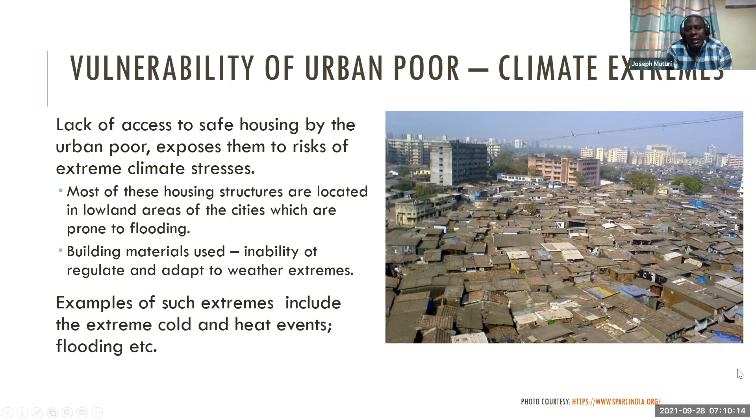We mobilized 40 organizations - civil society organizations, academia, local NGOs and international NGOs. The basis for that was they bring in their expertise, their resources, their staff to support the county in planning for Mukuru. All these plans were aligned with the county departments - for example, the environment consortium was under the Ministry, under the Department of Environment. So we mobilized organizations like the Stockholm Environment Institute and others good in matters of environment and climate.

There was a consortium looking at the land question, a consortium looking at education, and others looking at waste management. Basically each consortium was to work with the community.

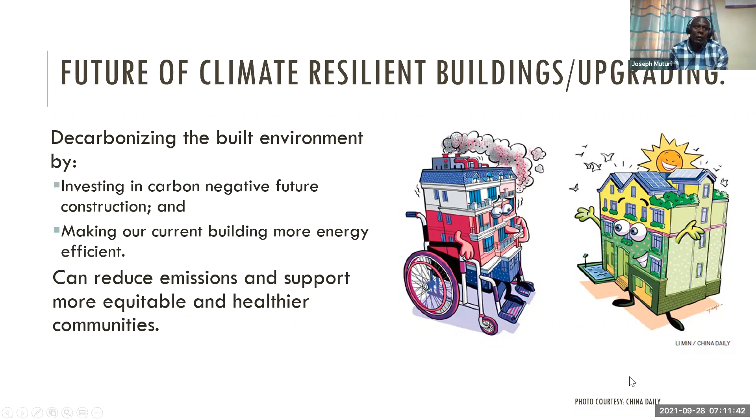One of the things we noted was that when it comes to public participation, the threshold, especially here in Kenya, is very low. The political class - either an MCA or an MP - will put people somewhere in a hotel and call that public participation. So for us, we used the Nyumba Kumi model to make sure all the residents of Mukuru participated in this and gave support.

Basically they were to give input on what kind of neighborhood they would want, in terms of access to housing, access to basic services like water, like connection to the sewer. The other thing is what we call the poverty penalty, where poor people pay more for services as opposed to other very formal, very rich neighborhoods.

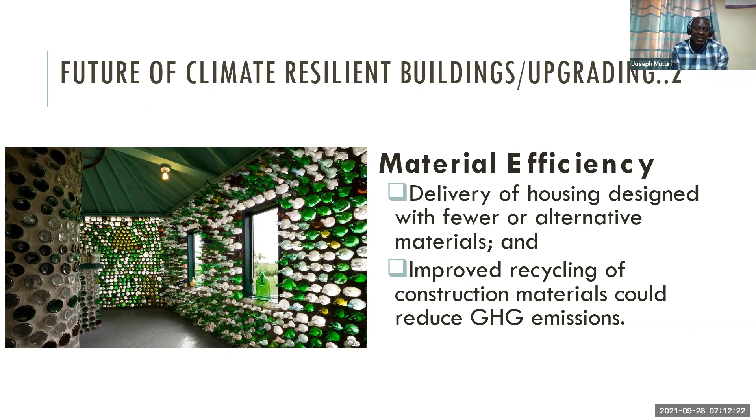So when it comes to water, they pay too much. When it comes to even the use of basic services like toilets, they pay too much.

The other thing was to also look at policy, and this is something that probably will speak to the discussion today. So if you look at our policies, yet most of the policies, we inherited them from way back. So if we want to really address the issue of delivery of affordable, climate friendly and good neighborhoods, we need to look at the policy interventions.

So from different angles, if you look at taxation, from the people who provide the building materials, for example, giving rebates for anybody who is doing low-income housing. If you look at the zoning, if you look at the land use regulations, and basically just to mention, Mukuru was more of a land use plan. And it's also to look at the building codes.

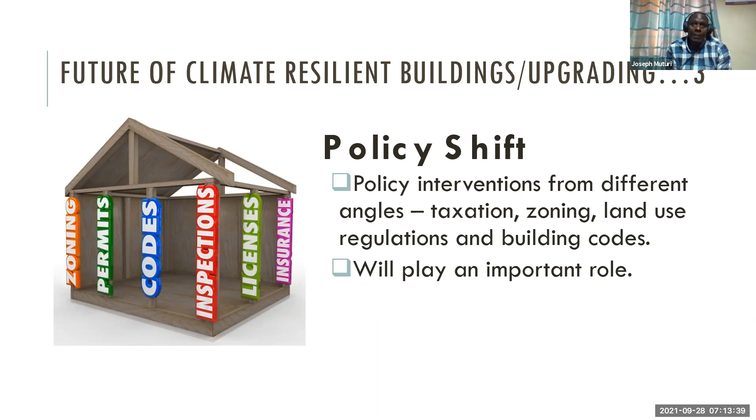For example, now that the implementation of the Mukuru SPA has started, we were able to negotiate in terms of the roads network, whereby the law says the road should be some number of meters, I don't have the exact figures. We are able to negotiate and reduce those. We realized if you build a standard road in Mukuru, then if you just build 3 roads, the entire settlement will be gone. So we were able to negotiate the roads to be 5.5 meters, some up to 9 to 12 meters.

So if you look at Mukuru, we are talking about 100,000 households. These are people who provide informal labor to the nearby industries. And if you look at the entire 689 acres, one of the challenges is that it's all grab land, it's all private land. And the excuse given by the county and national government is that we cannot touch private land, we cannot put services, we cannot even support the schools. We have over 200 informal schools where they receive zero support from government. So this was to address, number one, the land question and the housing question.

We did not want to go the titling way because we don't think giving titles to communities is the solution. So for us, we are approaching this on the housing angle, pushing the government to provide housing as opposed to giving titles.

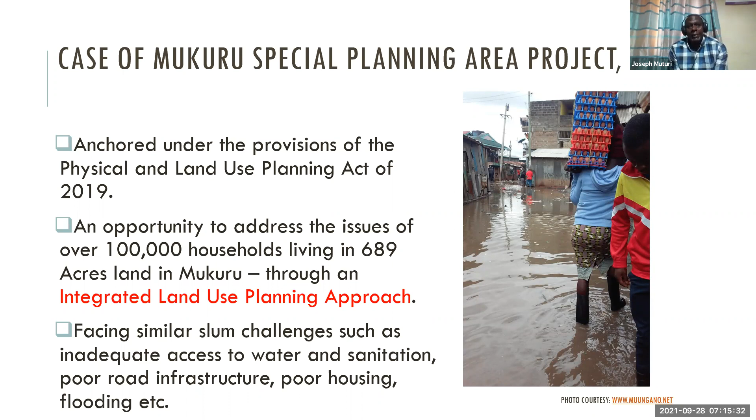So lucky for us, when the NMS was created, I think the Office of the President got to know about the special planning area. And one of the tasks given to the director of NMS was to implement the plan as it is. So if you look at what is happening now, the before and after, NMS came in, they have done roads, they have done hospitals, and now we are working on something called the Simplified Sewer.

And to push every plot, if you look at the rows, that's what in Mukuru or informal settlements is called a plot. A plot is basically one row of 10 to 12 structures. And if you look carefully, you will realize that there's no toilet, there are no bathroom facilities. Water was also a challenge in Mukuru.

Now the NMS has come, they have done a number of boreholes. So the other thing which was a win for us was when the government declared that they are going to do 13,000 houses, and I think a budget has been put towards that. We are looking at providing housing at scale. A lot of people, initially the magic number for people providing housing in this space is usually 5,000 to 10,000.

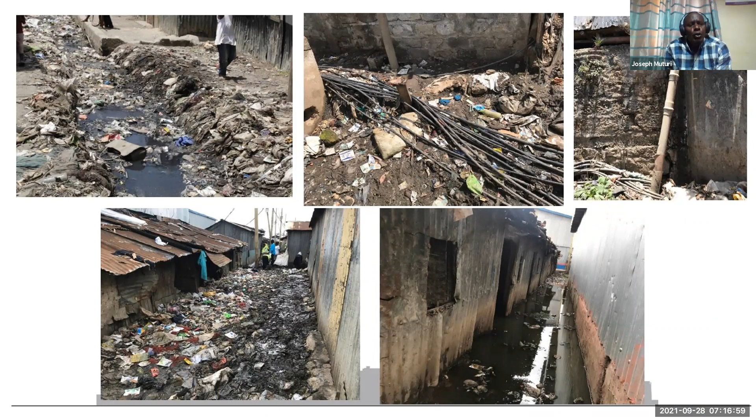So hopefully the works have begun. If you look at the drainage system, this is the reality in Mukuru. If you look at the pipes in the middle of the picture, it's what we call spaghetti pipes. These are the pipes used to reticulate water and provide water. If you look at how the conditions are in terms of where the pipes are passing.

So that's why we end up having challenges like cholera, because of the unsafe delivery of water to residents. If you look at other pictures, that's raw sewer, and this is a reality, it's every day, this is what's happening every day. So most of the waste, in terms of how they manage it, ends up in the Nairobi River, and it goes downstream. So those are some of the challenges we are looking at in terms of planning and implementing the SPA.

One of the things is a participatory planning process involving the community. I talked about community participation, civil society, academia, private sector, and the government. One of the reasons why the SPA is getting traction was, like I said, the community participation.

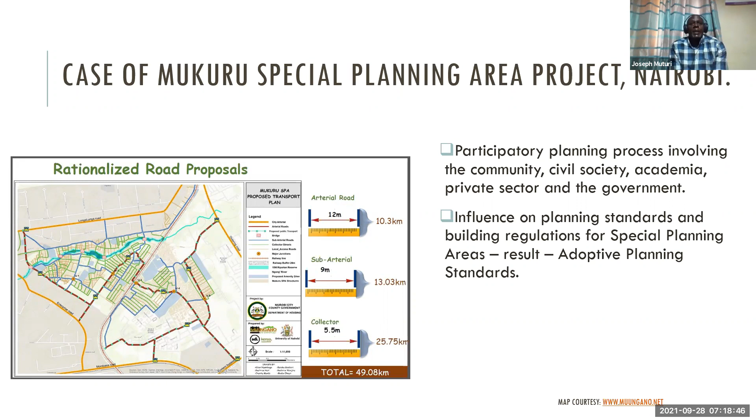The other thing was to bring in government and to support the Nairobi County in that. If you look at civil society or organizations that work in communities, everybody is doing their own little thing at some corner—one organization is providing toilets, another is doing a water tank. We challenge them: why don't we do something more sustainable, come up with a plan which the government can take up, the county can take up, and start providing.

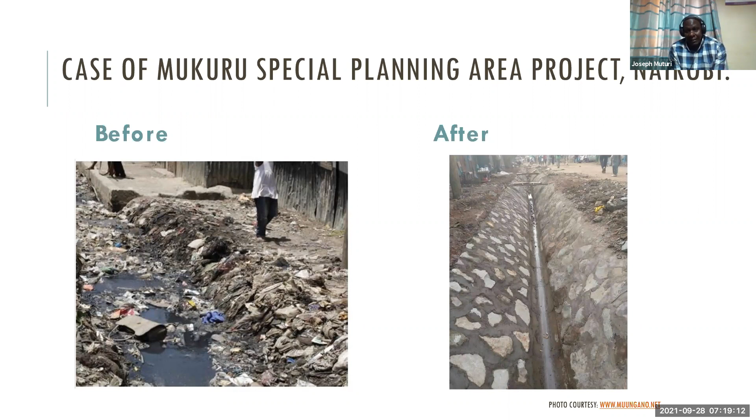So if you look at the work that has been done, NMS is doing drainage—they have provided drainage for the stormwater. Like I mentioned before, they have done a hospital, and they are now providing free, clean drinking water to the residents on a daily basis.

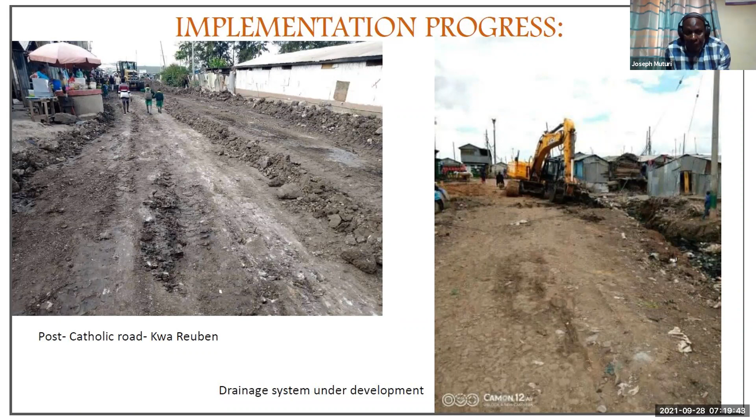The other thing was also, if you look at the roadworks going on, the connectivity between—initially when we were working, other organizations in informal settlements tend to look inwardly, at the challenges inwardly. One of the special things the SPA came with was also to look at how we link Mukuru to other areas of the city in terms of road networks and sewer connectivity. So that's what's happening in Mukuru.

So for us, the lessons were—and I think it's really important—to look at providing housing right from the planning, where it encompasses the views, infrastructure, public spaces, the environment, safer neighborhoods, and a shift to policy.

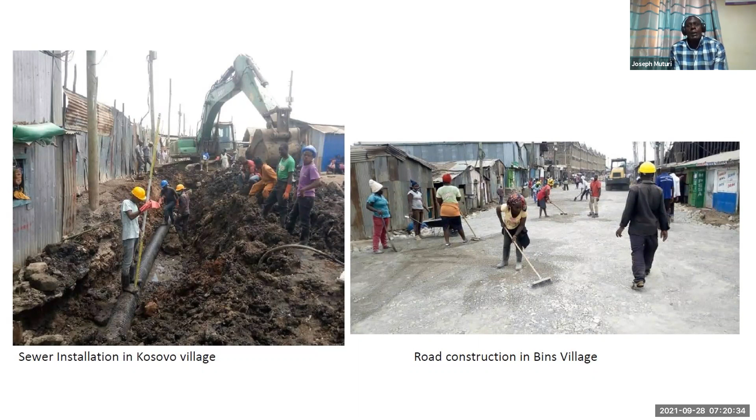I think it also calls for a rethink of how cities design projects, implement projects, and bring in other partners and stakeholders, to look at all the elements that come with creating safe neighborhoods with public spaces, taking into account the issues and challenges of climate change, and their expertise who can provide that.

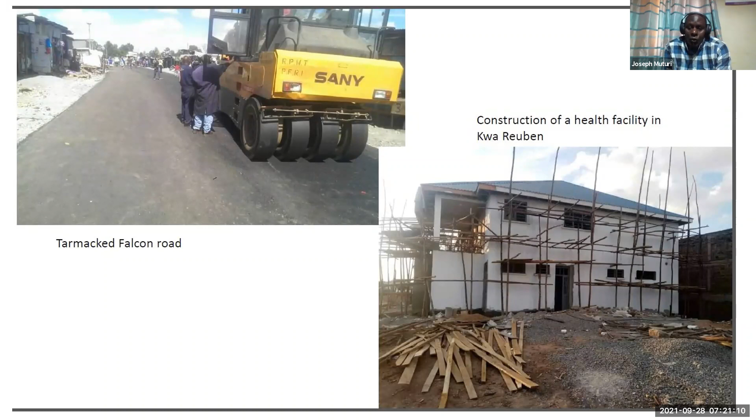So basically that was what was done, and it's what is happening. Hopefully we are looking at the next phase, which is housing. We are also looking at the next phase, the public spaces.

There is Mukuru River, where we have started working with young people in Mukuru, basically to clean up and reclaim the river. They are negotiating with some of the people who have encroached up to the river. One of the groups of young men we work with in Korogocho is called Komb Green. We've been taking some young people to see how they are reclaiming these public spaces—planting trees, planting grass.

Thank you very much for that introductory presentation. That's fantastic—we're talking about ambition and we're talking about action. Taking on that initiative and getting it to where it is, is a huge feat. One comment from that: we keep hearing, especially around Africa, that 60% of the people in hospitals are there because of communicable diseases that could be avoided, especially around the built environment. Thank you for those pictures that show us what's happening on the ground.